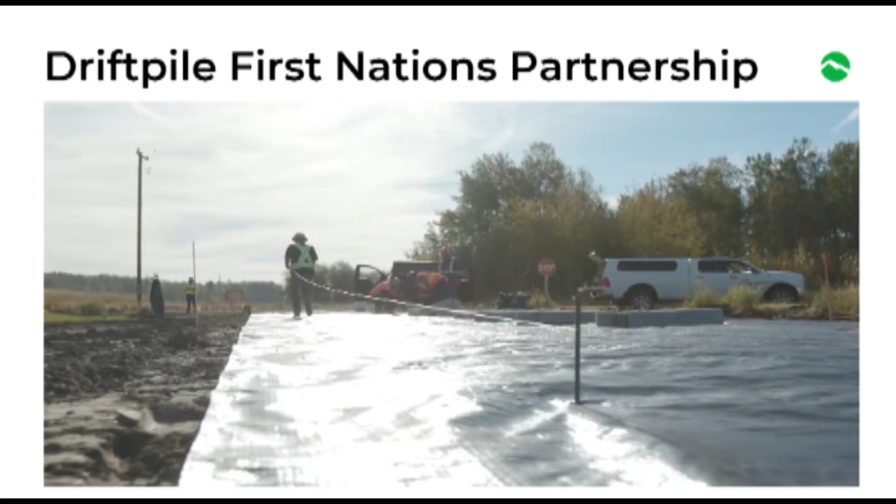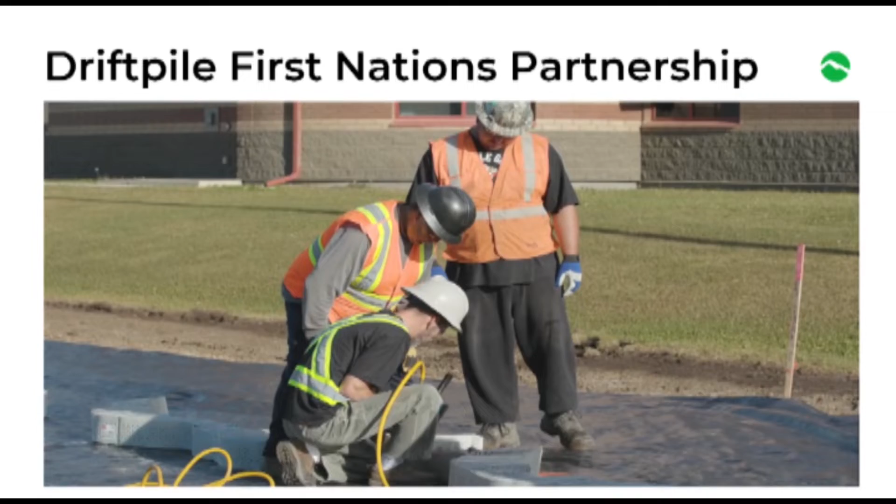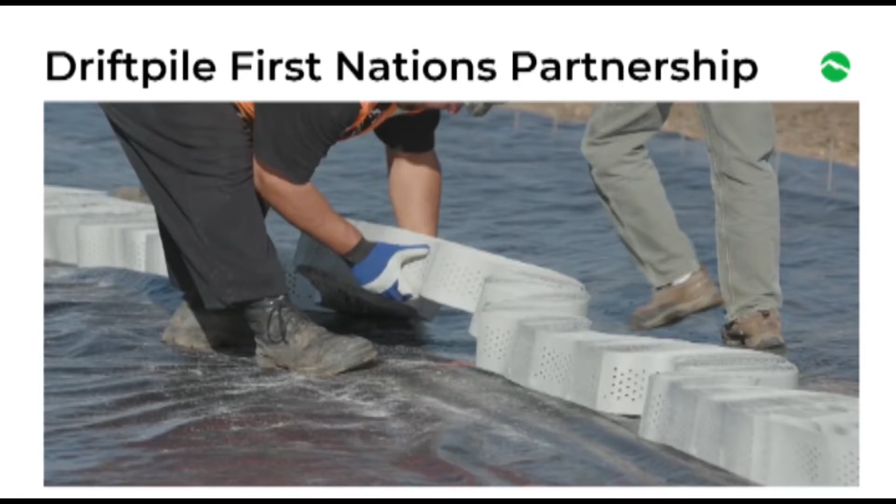With the partnership in Paradox. I'm also very excited with the thought that's going in for the making of the road that will be happening. The exciting part about it for me is just the maintenance and the cost of maintenance. Our membership are clearly aware of the cost of maintenance every year on roads and maintaining roads. And I'm really, again, going to say I'm excited about what it's going to look like 5 years from now, 10 years from now, for Driftpile Cree Nation and maintaining the roads for the nation. But this project will definitely be something that I'll be looking at in years to come to see where we're at. So very excited about the opportunities of Paradox and very, very appreciative of the partnership and the respect that comes with that partnership.

So we're fortunate to have many partnerships within Western Canada, and we're looking at developing more partnerships out east. We all know that Indigenous communities, generally speaking, are in a lot of regions that are remotely located. So this technology helps to minimize costs for construction on the front end and on the back end. So assets such as roads are a big component of the way of life for our Indigenous communities and getting their services and critical services up there.

Although the last presentation on drones, it was very exciting to see that there's new technologies that are allowing them to get some of their resources over to their communities in a much more efficient and cost-effective manner.

So a little bit about the technology, specifically the technology I'm going to talk about, which is a tough cell or a cellular confinement technology. It's essentially a bunch of hoops or plastic cells that confine aggregate that are inside the cell to give added strength to that aggregate inside the cell.

It helps distribute the loads that are applied over top of it to minimize those loads that go down into the weaker subsoils that generally don't have the same bearing capacity that, let's say, sub-base layers or base layers have. It's a cost-effective solution for both paved and unpaved roads.

Some of the benefits of this technology, it allows for different types of aggregates to be used in road building that traditionally wouldn't be used. So for example, sand sometimes isn't normally used for structural layers in a road. If you take sand and confine it, you can increase the strength dramatically.

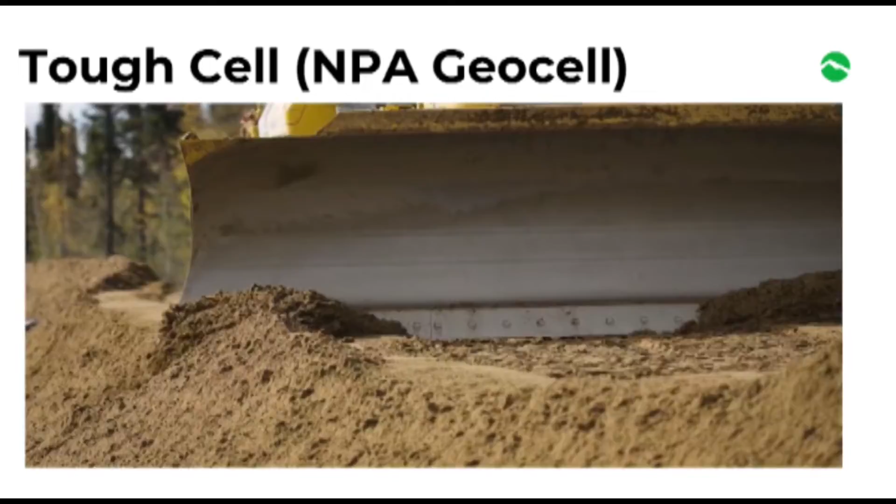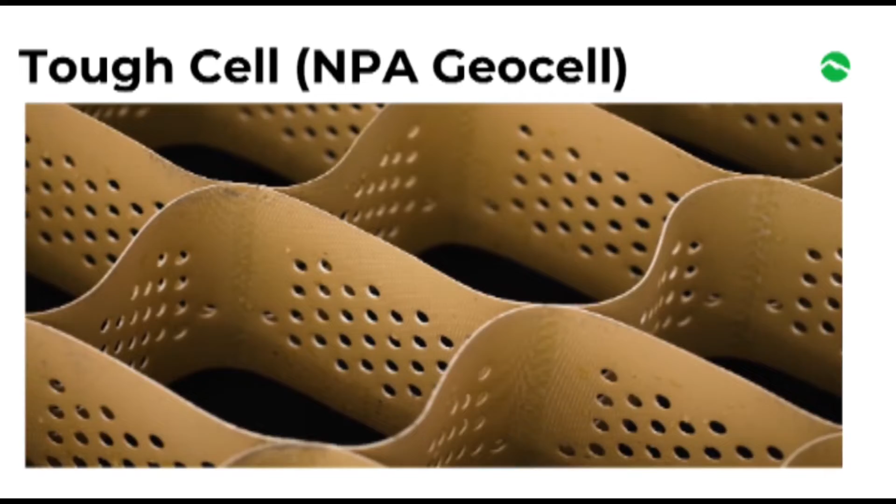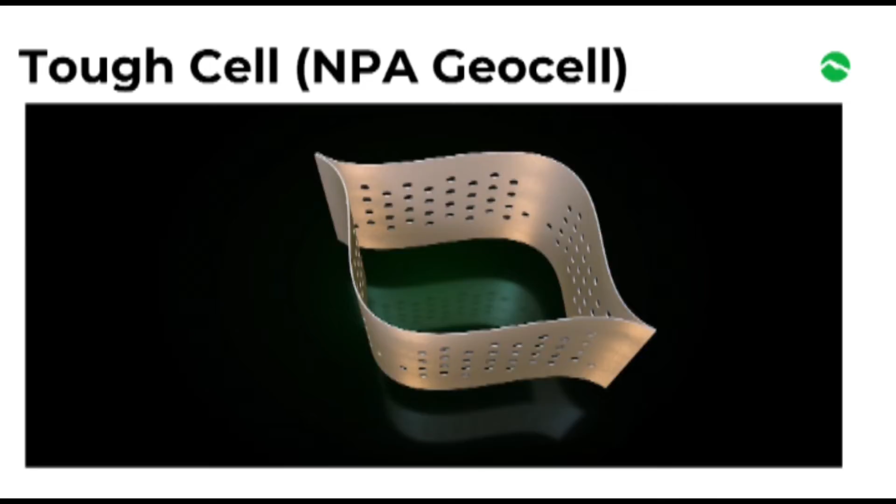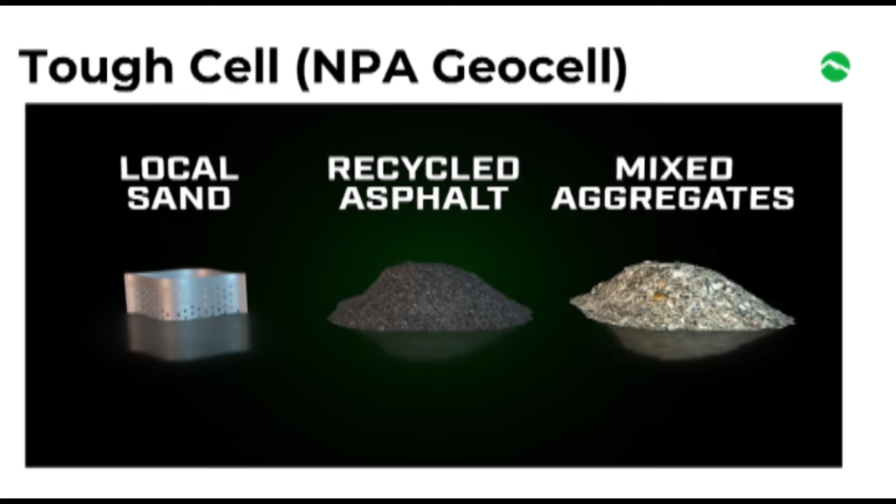The best things are built to last. When it comes to highly trafficked roads and load-bearing job sites, reliability is key. ToughCell by Paradox is an NPA geocell reinforcement solution that can be used to build roads and surfaces that last as long as you need them to. ToughCell is an expandable web that spreads out to form a honeycomb of vertical pockets. Pockets are then filled with a granular material, like local sands, recycled asphalt, or mixed aggregates. Once full, the cells are then compacted.

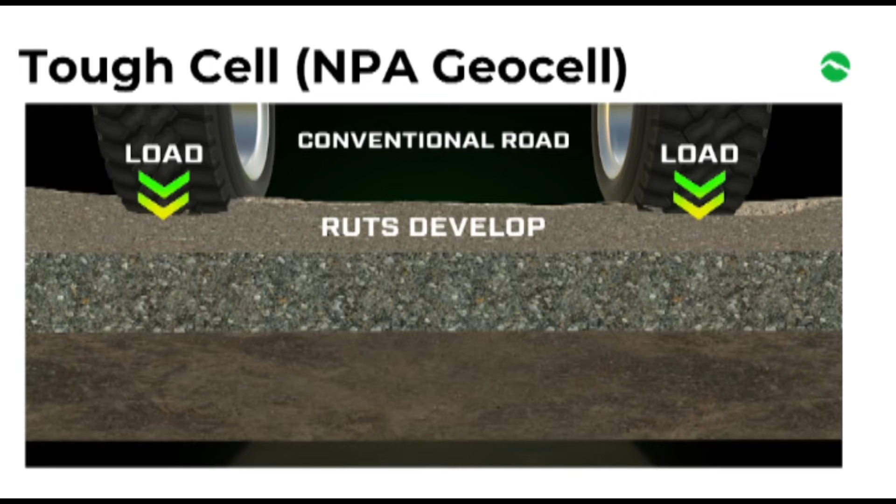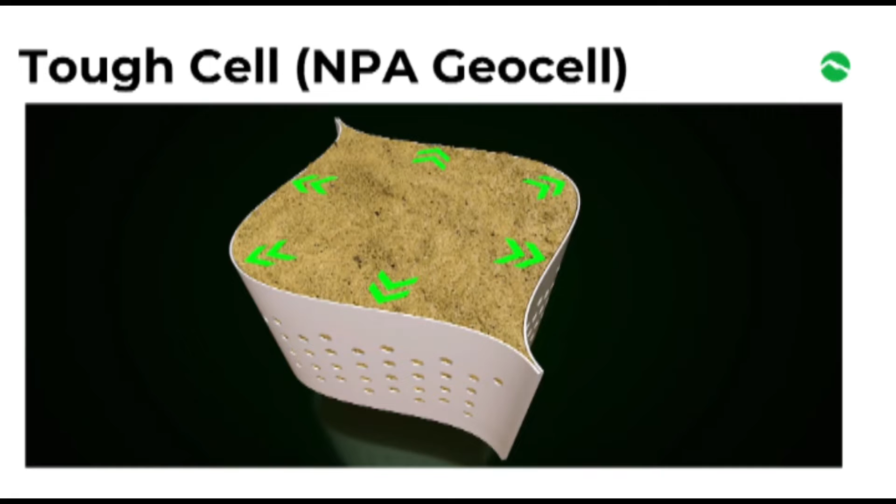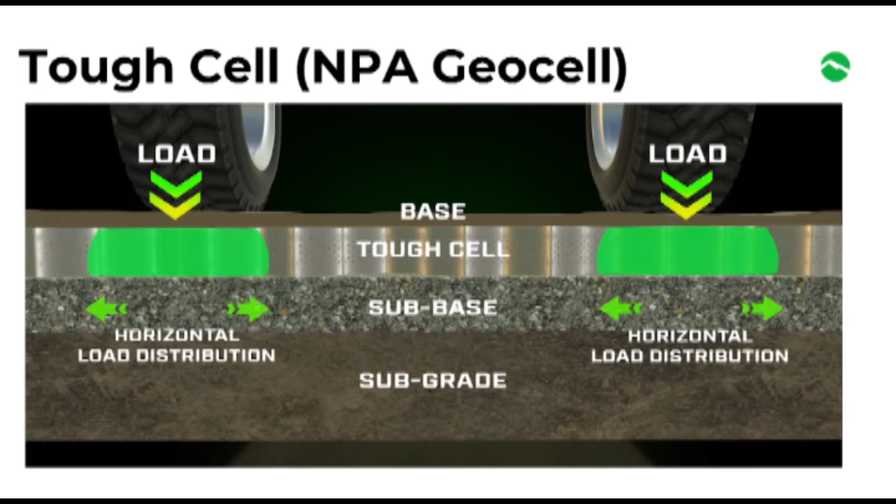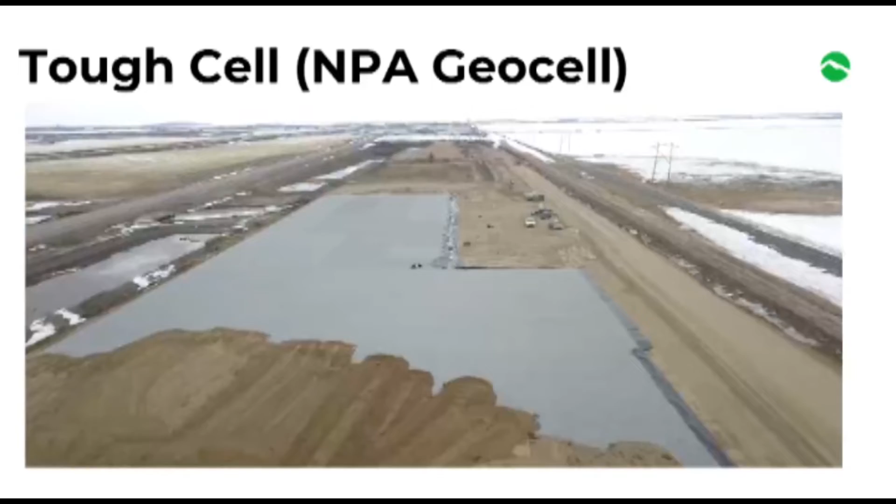With the conventional road structure, the load weight spreads downward and in all directions. This can form ruts and cause degradation of the subbase layers. On a road built with ToughCell, the granular material presses against the sides of each pocket, and most of the vertical stress is distributed horizontally. The material doesn't shift, the road remains strong, and any weak spots on the ground beneath the ToughCell layer are bridged. ToughCell can be used to build haul roads, but also pads, earth stabilization, and paved and unpaved infrastructure.

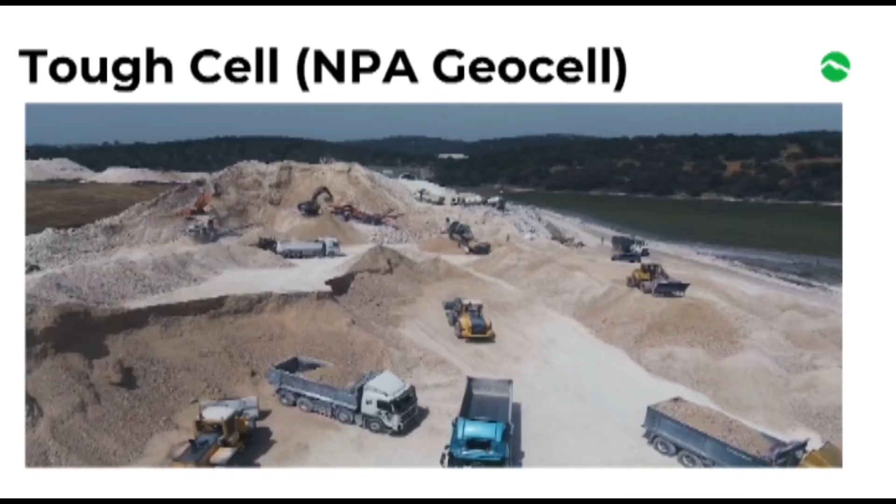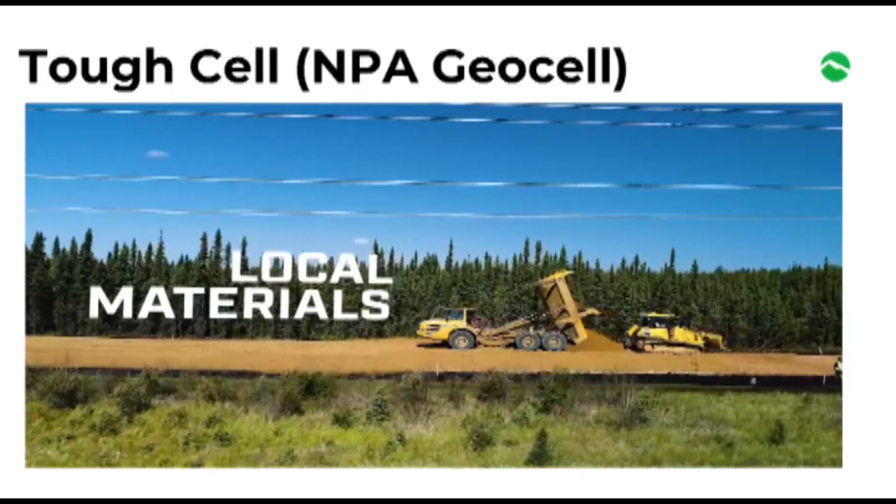Compared to a conventional road, ToughCell requires less material and a shallower depth of material to fill in its geocells. Local materials can be used, so there's no need to incur the cost of bringing in gravel or sand from somewhere else. ToughCell builds take less time and need less maintenance, resulting in a dramatic reduction in CO2 emissions. ToughCell is a smarter, stronger, more responsible choice for your next build. So when you need to be on solid ground, choose Paradox.

So I know certainly I've spoken to various community members in Timmins. They're like, oh, you got road solutions, that's great. We've got these potholes everywhere, what can you do? Unfortunately, with those problems, you can either do a full depth reclamation, which means you excavate all that poor material out and rebuild it from scratch, or you just keep putting Band-Aid solutions in with patching it, and it'll continue to happen.

So this solution will allow you to provide a longer, more durable road that requires less maintenance, and when there is maintenance required, you're trying to avoid that full depth reclamation, so you just need to surface dress it on top. It's used in multiple applications, from road building, slope stabilization, railway ballast foundations, intermodal yards, reservoirs and landfills.

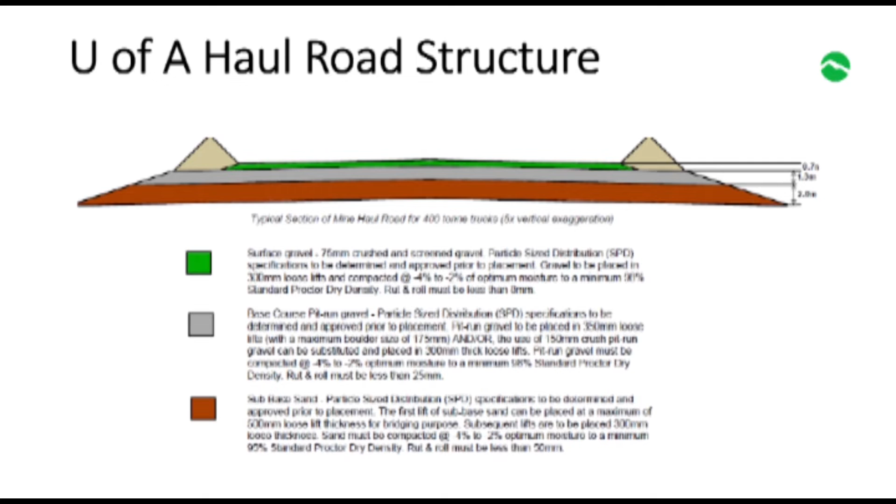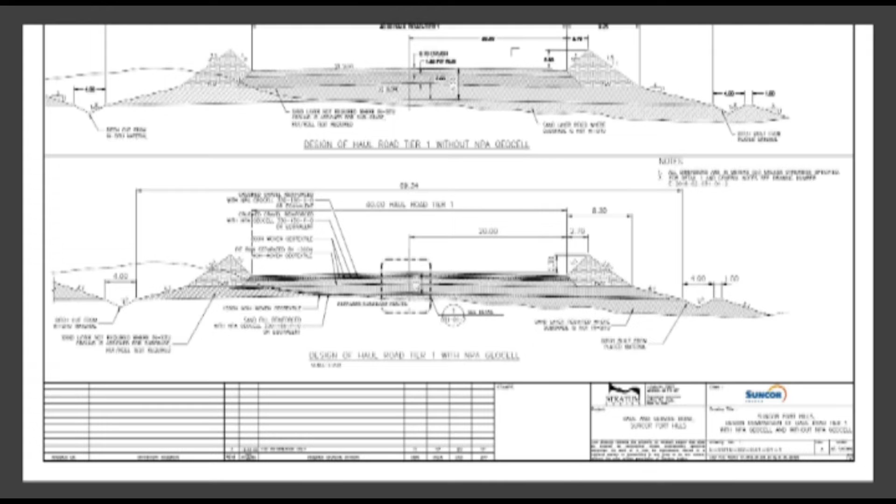So there's a requirement for various types of well-graded aggregates. And what we were able to do is now take, on the upper picture here, or in this design drawing, you'll see the standard design. We're able to cut that overall thickness down from 4 meters down to 2.65 meters. On top of that, we were able to use a lot of their overburden materials that they would normally dispose of inside of the cells, so they can use what would normally be trashed and use it inside the cells to actually build the road. So it worked out really well.

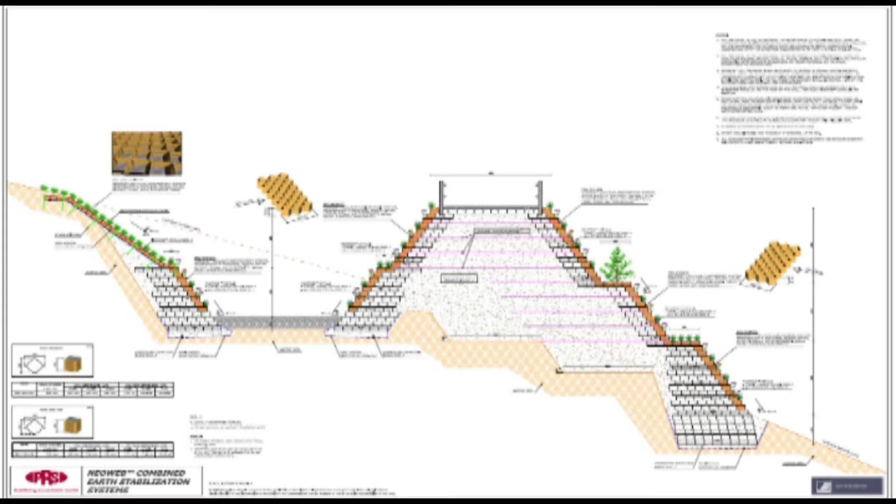Here's a pictogram of some various applications that you can use for bridge abutments, retaining walls, numerous applications. This is a project that we did for one of our partner clients in northern Alberta. They needed to build a permanent access route to an old compressor station that they were expanding to meet the demands for natural gas transmission throughout the area. We had to build an 11.5 kilometer road into the area to allow them to access the compressor station that we also expanded as well.

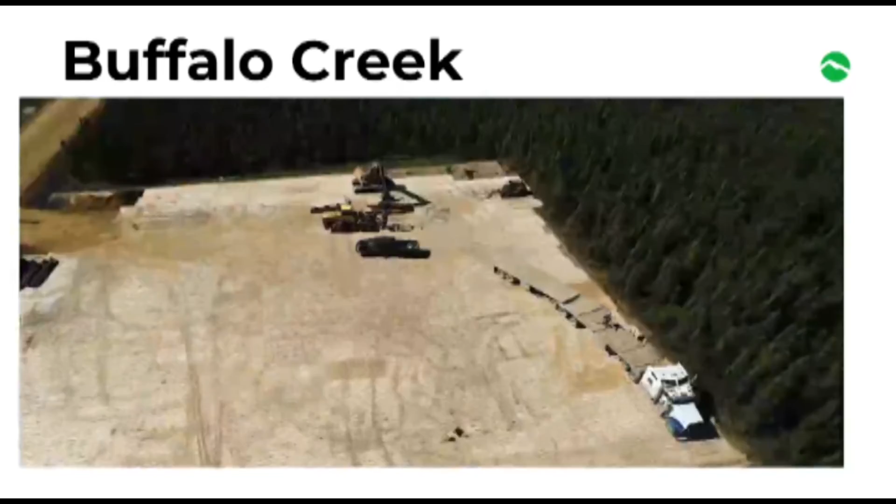So we are building a road for a very important client. The way we're going to do that is we've got to cross muskeg in a pretty sensitive wetland area. To do a conventional road build here, you would have to excavate an incredible amount of material. And I don't even think it's possible, because how do you get out there with equipment to excavate that material? We're using Geocell technology to build this road. With our methods and our materials, we can start at the edge and just start building the road and pushing it out.

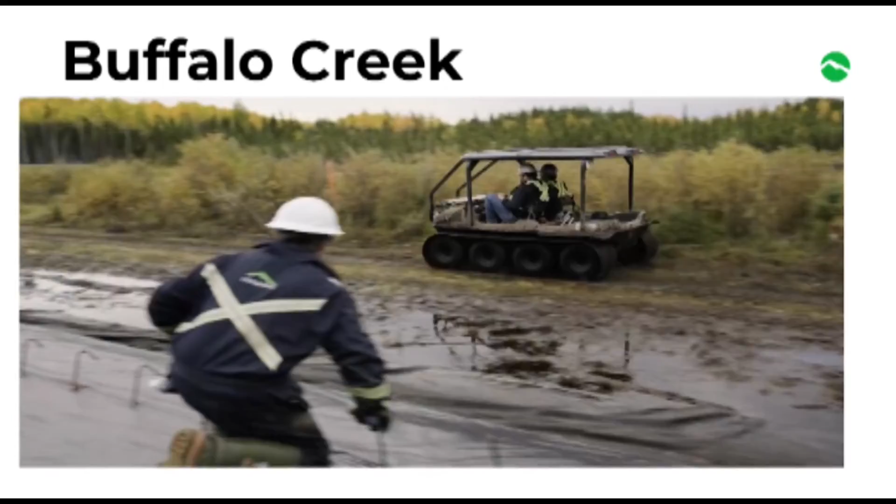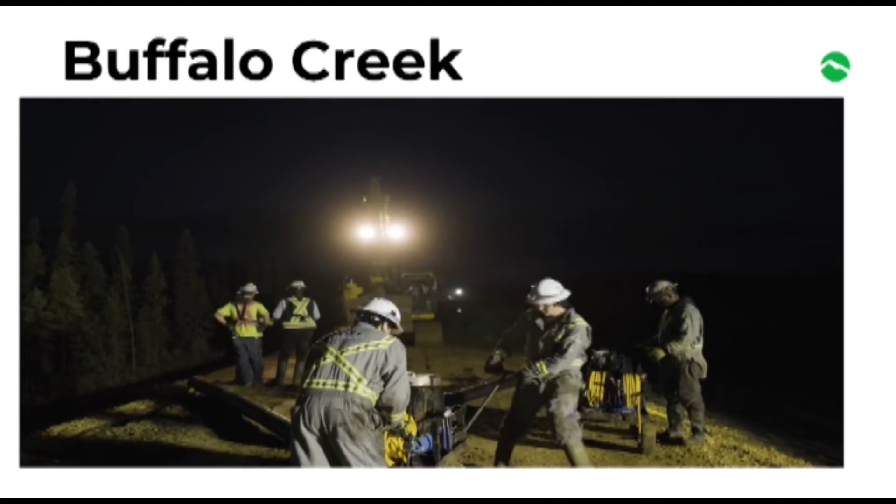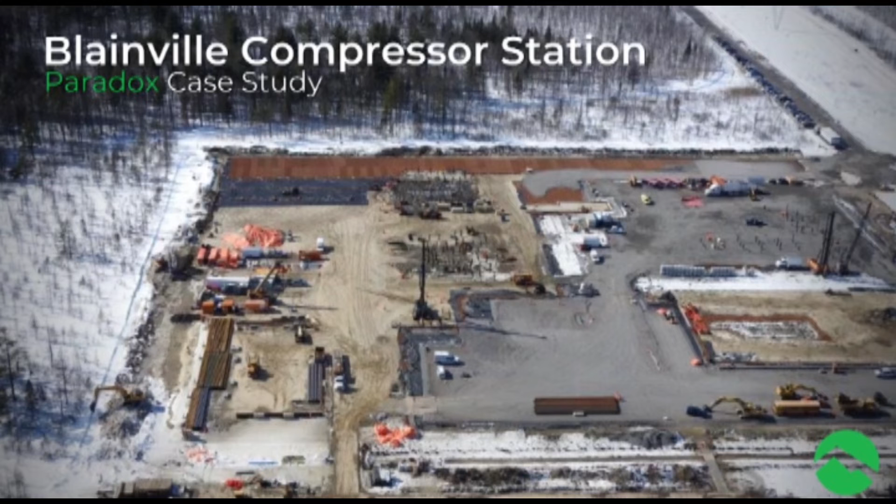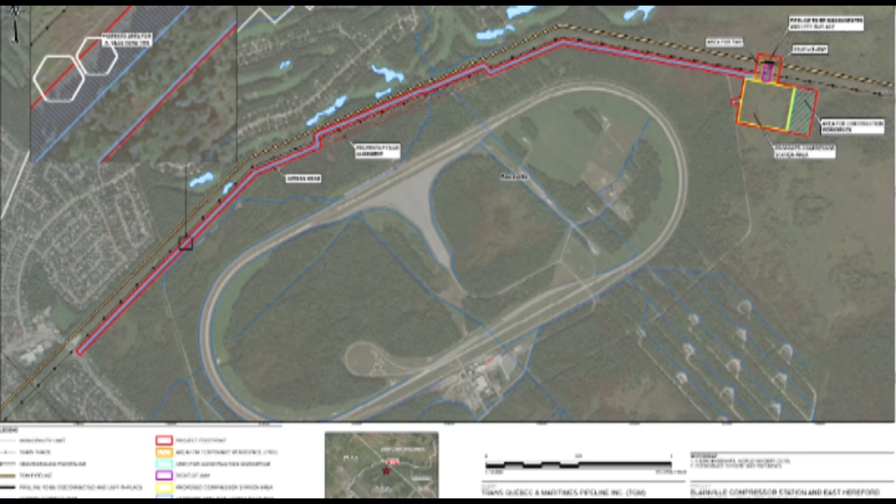This is the most recent one that I spoke of earlier, which was done in Quebec. Similar project, but unique circumstances on the project. We were limited to specific right-of-way requirements because there were housing communities, plus other private lands and utilities in the area. They also had very weak underlying clays that could be susceptible to major settlement under some of the loads that they were anticipating. So it was a unique, challenging job. Here's an example of kind of the conditions that we were building directly over top of.

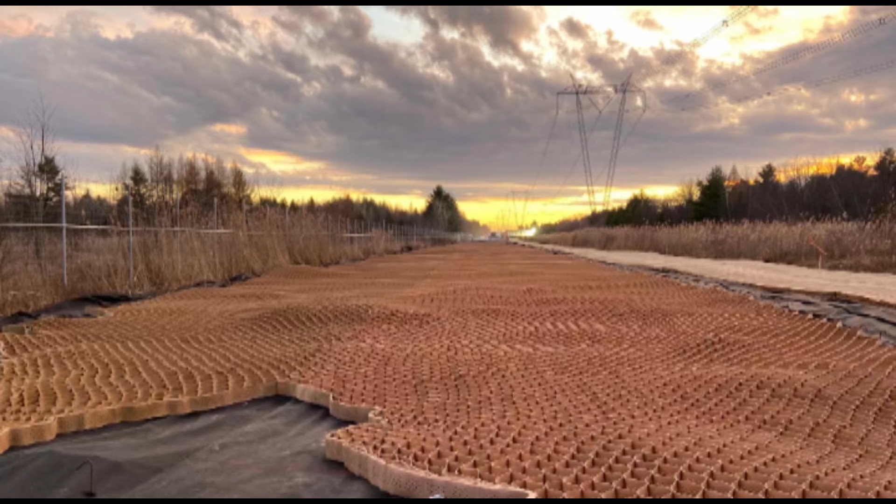So we built a 4.5 kilometer access road to the compressor station so they can increase the distribution of their natural gas systems with their partners here. So here you can see the utility lines that we had to deal with on the left-hand side. And on the right, we had another private landowner they had to consider. So we're putting in our first layer, backfilling it. This is another shot of the pad where they're actually going to be tying into the main line.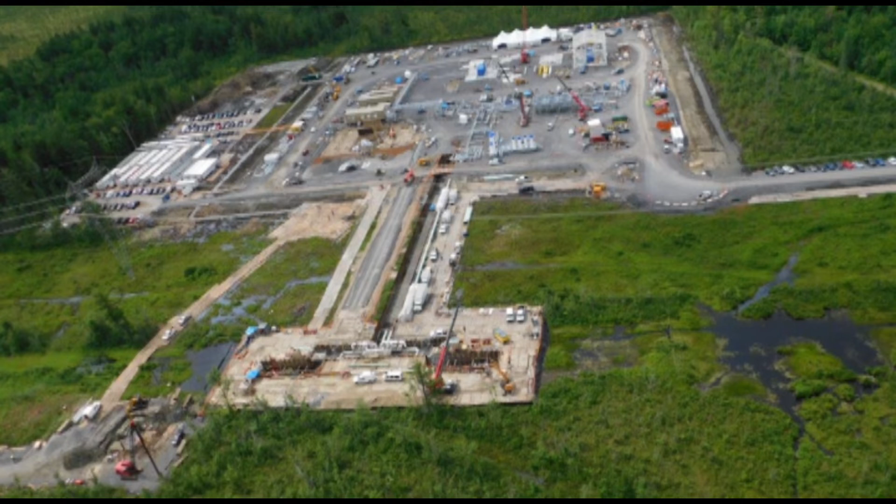Aerial view of it being done, and again, one of the benefits of this job was that we eliminated the need for them to excavate any of the natural materials. So reclamation on the back end would be easier as well, because they didn't have to re-import some of the natural materials or organics that were in place.

This one's a project that we're very proud of. We were part of the team that was able to put the Hudson Bay rail line back into operation in 2018. 2 years prior to that, there was some major flooding from some rain events that washed out numerous sections of the line, and we were asked to help in coming up with solutions that allowed the community to get land access travel back to the community. So we were tasked with repairing numerous sections of the line to allow some traffic to be used on that rail line again. Here's a quick video of that.

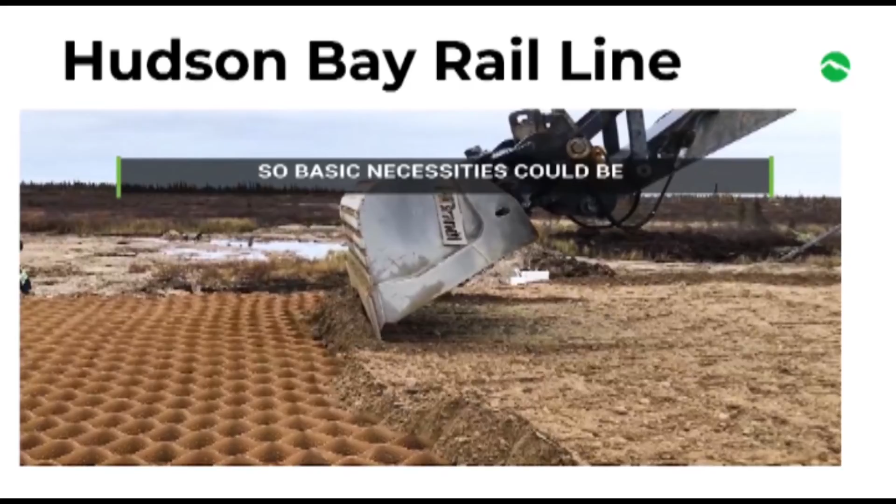One of the really challenging things about that job was the logistics just to get aggregate out on site. There's only one way in, and that's on that rail line. So we were able to utilize a lot of the washed out material that had spilled out back into the cells. We had on-site geotechnical engineers maintaining and ensuring that the gradation was right. So it was a big savings for everybody on the re-establishment of that line.

So this technology has been validated in numerous academic papers throughout North America and internationally. So I just want to make sure that it's something that has been utilized numerous times in various municipal government regulations. Yeah, that's the gist of it.